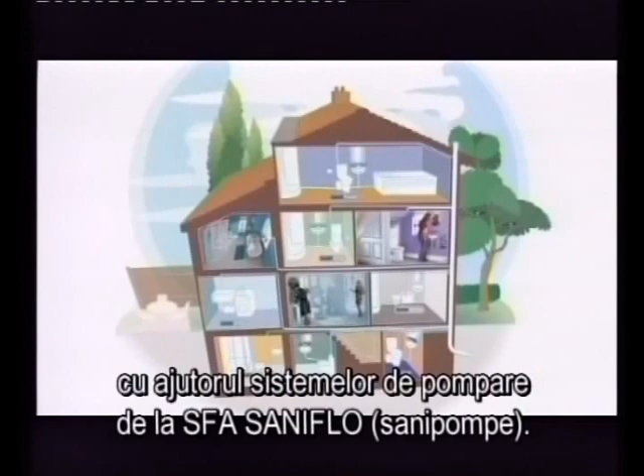Like this. It's easy to add luxury and value to your home with Saniflo pumping systems. From loft to basement, and most places in between. A downstairs loo, a kitchen or utility room, even a bath or shower room.

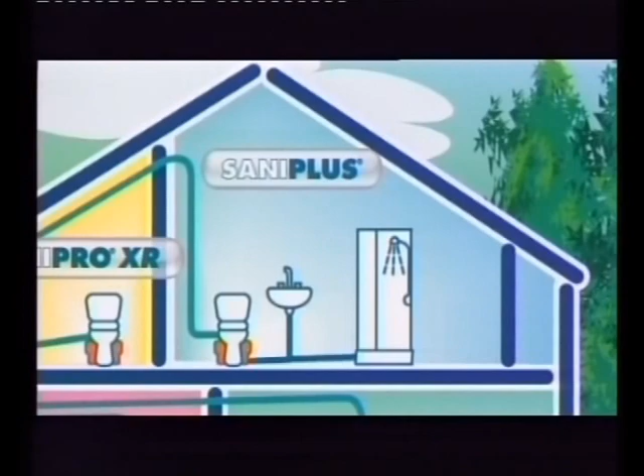The key benefit the SFA range offers is extra facilities almost anywhere. From loft to basement and most places in between. An understairs cloakroom, a basement installation, an ensuite shower room or a loft conversion.

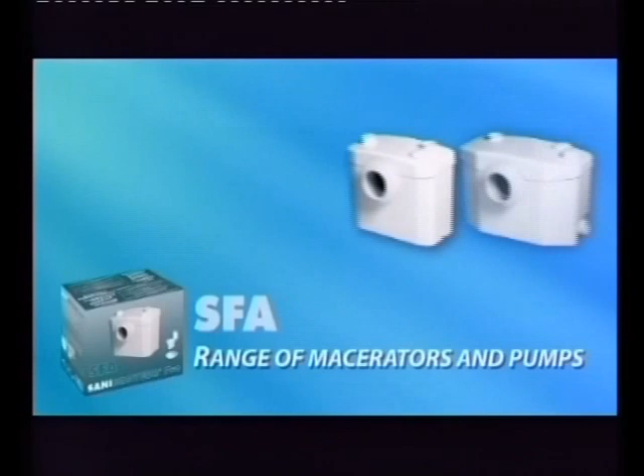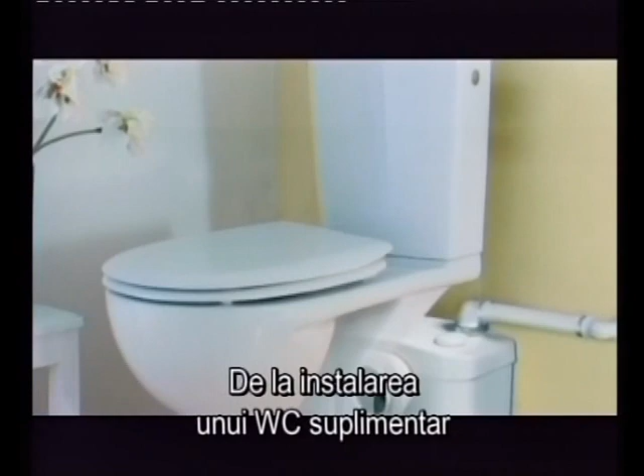There's a range of SFA products, each designed for particular applications and markets. From an additional WC to the addition of a complete bathroom in hard-to-plumb places.

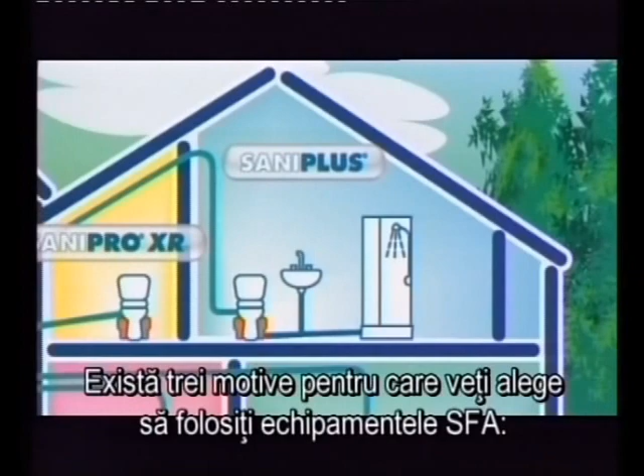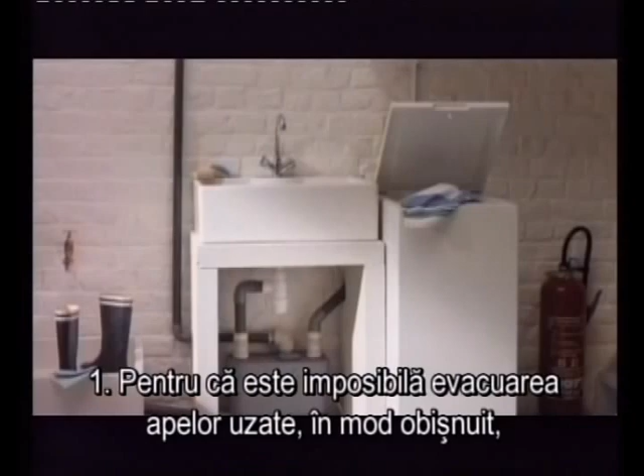There are 3 reasons why you would use a SFA unit. 1, because it's impossible to use conventional gravity drainage, as in a basement. 2, where it would be too disruptive. Or 3, where it would be too expensive.

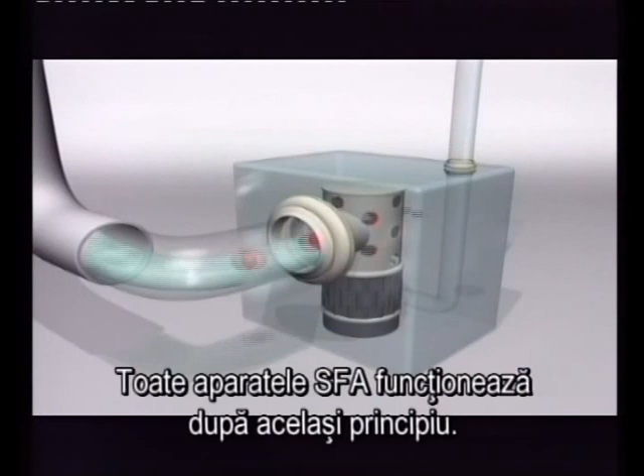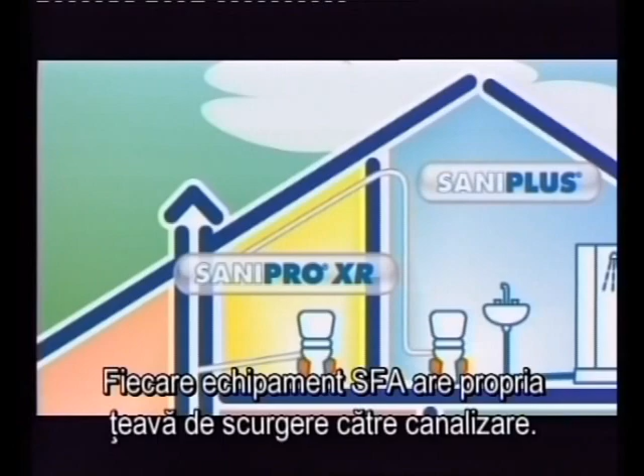All SFA units work on the same principle. Water and waste are drained by gravity into the unit. As the liquid rises, a pressure switch automatically activates the motor. Waste and water are macerated and then quietly pumped away through small bore pipework to a remote soil stack or sewer. Each SFA unit needs its own separate discharge pipe to the soil stack.

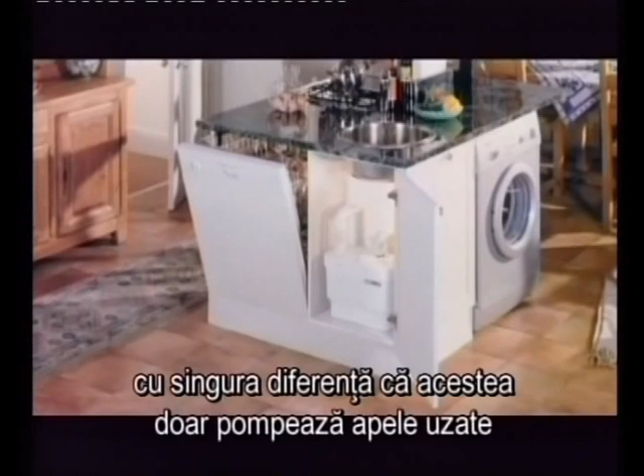The non-macerating pumps in the SFA range work on the same principle, except that they take only wastewater and cannot be connected to a WC. Depending on the model chosen, waste and water may be pumped vertically or horizontally, or a combination of both.

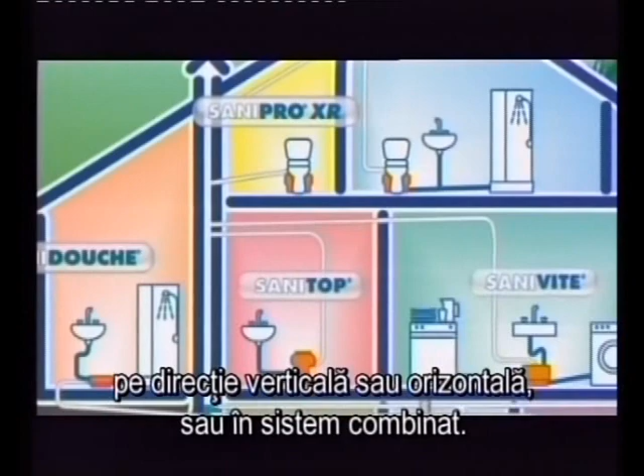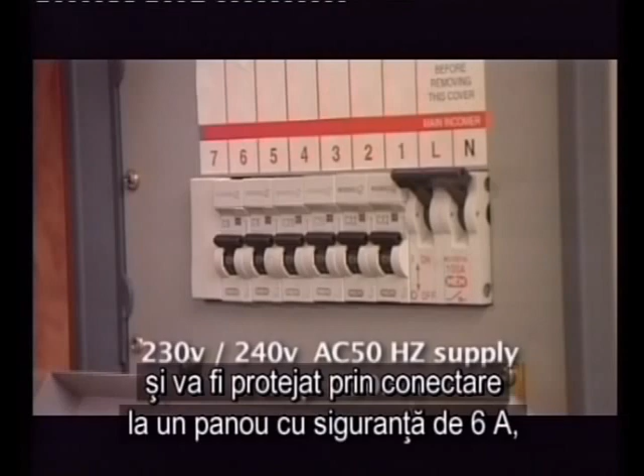Having decided to use a SFA, you must respect the standard electrical norm requirements. The unit requires a 230 or 240 volt single-phase AC 50Hz supply and should be connected to an unswitched fused wiring connector protected by a 6 amp fuse or circuit breaker. Warning: before any intervention on the appliances, disconnect the power supply.

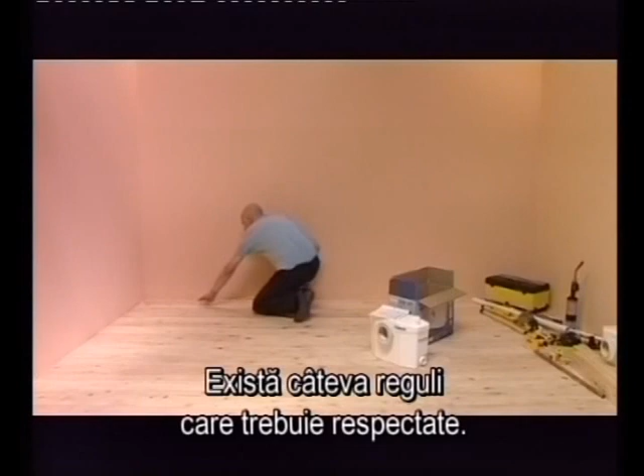Installing a SFA correctly will ensure that the installation will operate efficiently and that it will be covered by our guarantee. The guarantee does not cover incorrect installation or misuse. There are a few important do's and don'ts. Always run any horizontal discharge pipe on a minimum 1 in 100 fall.

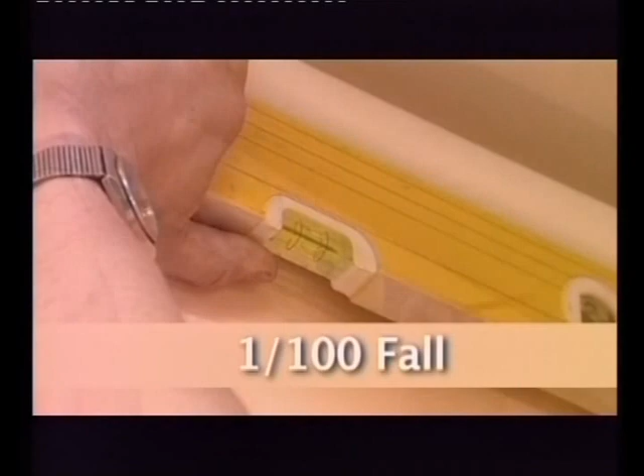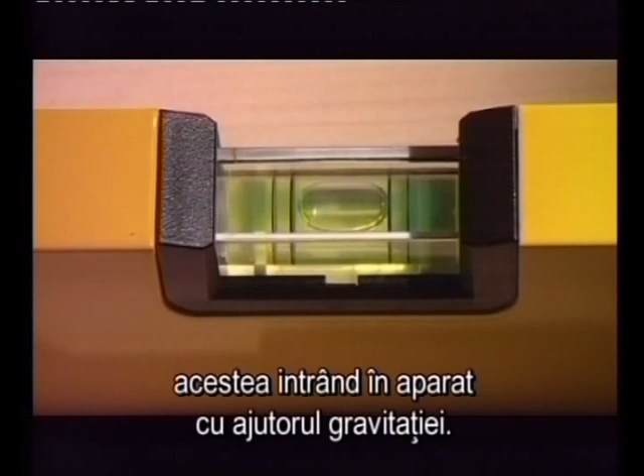Remember that the pump macerator unit does not suck in the incoming waste, so this has to enter the unit by gravity. This is especially important when installing a low trap item such as a shower. To avoid any risk of discharge, the sewage pipes should be fixed at a 3% fall.

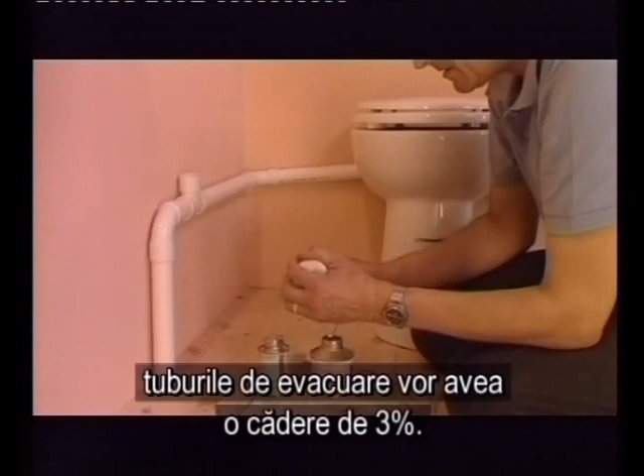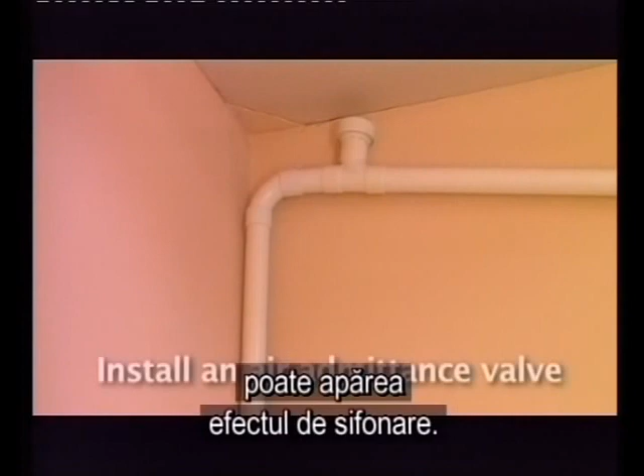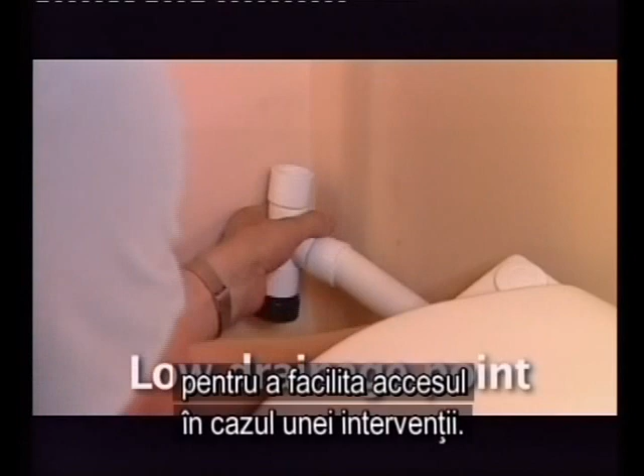If the discharge pipework runs to a level considerably lower than the unit, the resultant siphoning effect can suck out the water in the unit. Fitting an air admittance valve at the high points of the pipe run will overcome this problem. It's advised to install a drain-off point in order to be accessible for maintenance. Each SFA unit needs its own separate discharge pipe to the large bore discharge pipe or soil stack.

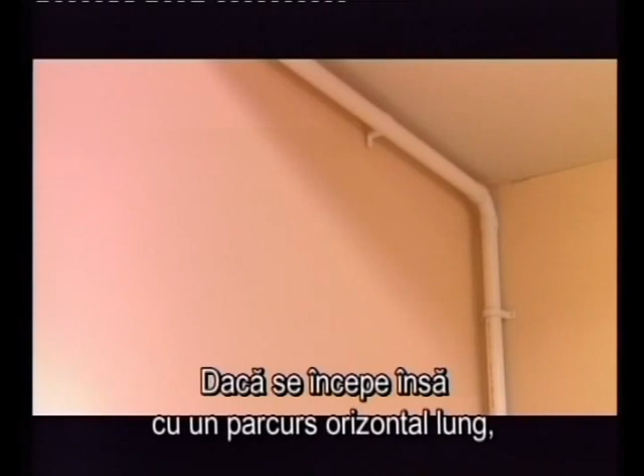Always run any vertical rise that may be required at the start of the pipe run, as near as possible to the SFA unit. This will ensure maximum pumping efficiency. A long horizontal run adds unwanted friction loss to the pumping operation. Vertical pumping reduces the distance the unit will pump horizontally, roughly by 10 meters horizontally for every meter of vertical lift.

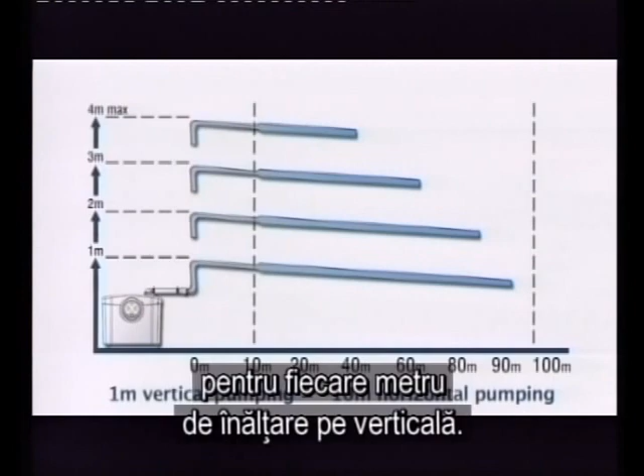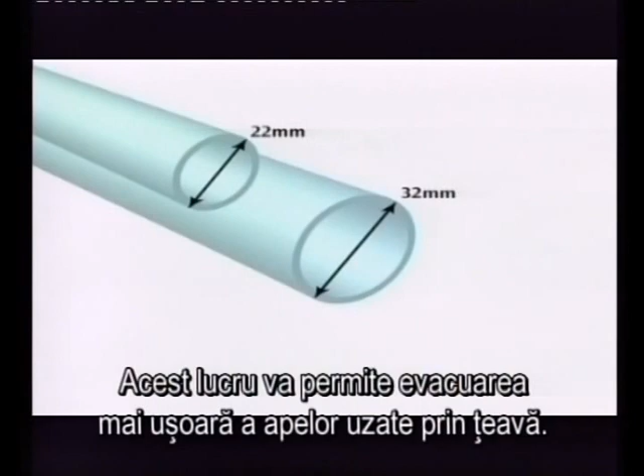For the SFA macerators, a 22mm discharge is suitable. You'll need a 32mm for the non-macerating pumps. If a horizontal run is longer than 10 to 12 meters, it's advisable to increase the bore size to 32mm. This allows for easier drainage of the pipe. For every bend fitted, the vertical pumping is reduced by 50 centimetres.

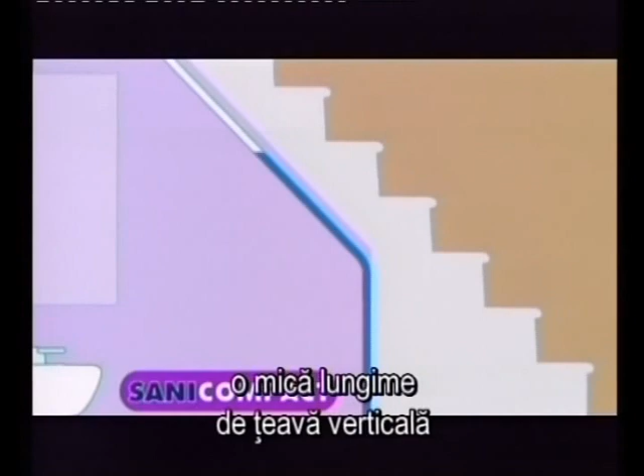Exceptionally, as under the stairs, a short length of vertical pipe can be placed at a 45-degree angle. A useful tip to remember is to deburr copper edges carefully, and if using plastic, ensure you wipe off any excess solvent.